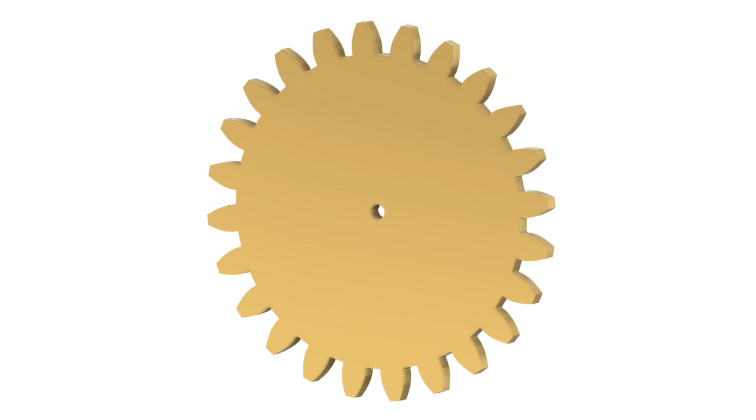Gears have many applications in our modern society. We use them for cars, clocks, bikes, toys, pretty much anything mechanical. The cogs or teeth on gears are what make the magic happen. They interlock, allowing for the transfer of power from one gear to another, and when two gears have different amounts of teeth, you create a gear ratio between them.

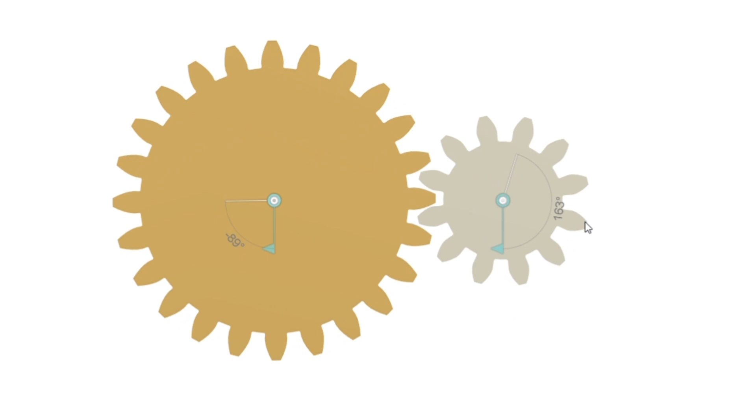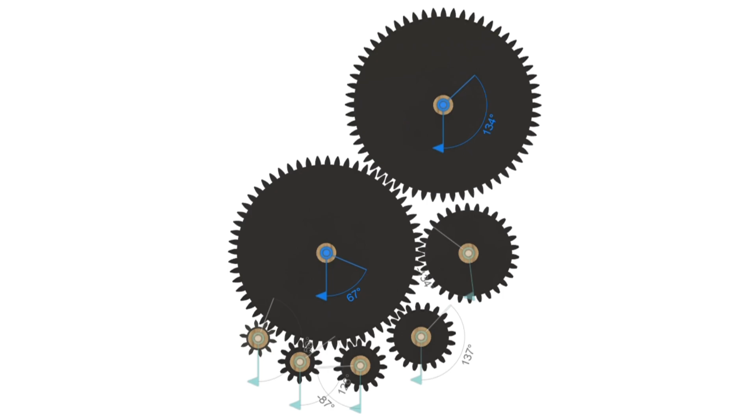Gear ratios are what allow you to have a mechanical advantage, making something seem lighter because you've increased the amount of torque that you're able to generate by using a smaller gear, like so. You could also use the gears to speed something up, like so, allowing for neat tricks like this when you've got multiple shafts spinning at all different speeds, despite being driven by the same gear.

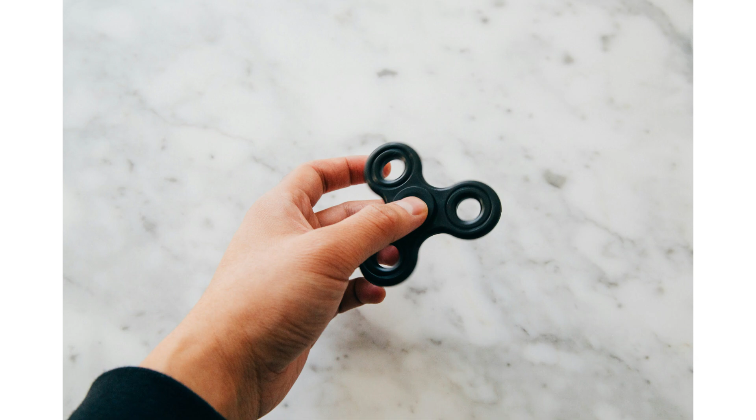So what can we do with this information? Well, a lot. We could make gearboxes that power drones, cars, planes even, but I have something much more important planned for today's video. We're going to make fidget spinners. Well, not that kind of fidget spinner. We're going to make gear spinners that interlock and drive each other.

I'm going to use spur gears for this design because they're the most efficient type of gear, capable of efficiency up to 99%. This means that when you're using a spur gear to power another spur gear, up to 99% of the energy that you put in will come out. The other 1% is lost to frictional forces between gears and the air.

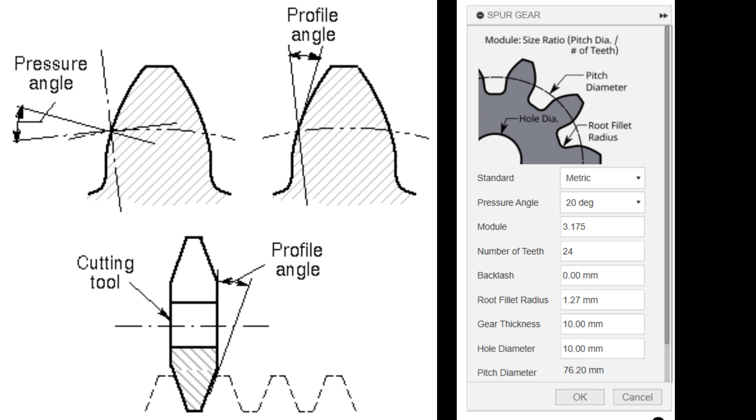So, in making a spur gear, you'll notice I have a few numbers to plug in. Starting with the pressure angle, it's the angle between the line of action and the line tangent to the pitch circle. We'll keep ours at 20 degrees. The larger angle distributes the force more evenly along the tooth profile, which reduces the likelihood of tooth failure or deformation under heavy loads, under normal circumstances. But it won't matter anyways, since none of these gears will be under any significant stress.

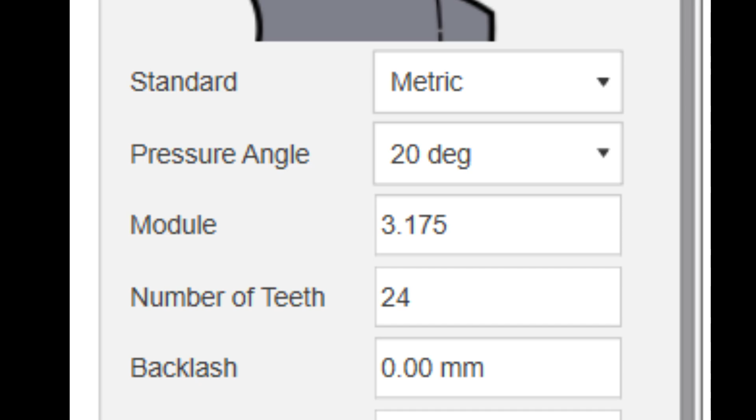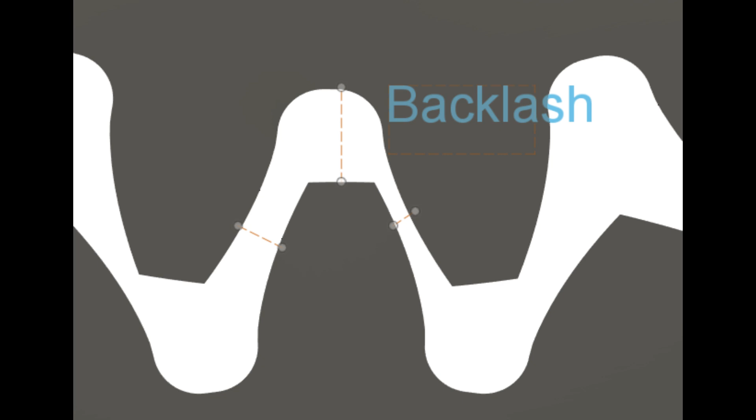Next is the module, which is the measure of the gear size and determines the size of the teeth. It's the ratio of the gear's pitch diameter to the number of teeth. In metric units, the module is expressed in millimeters, and here we have set it to 3.175. Backlash is the small amount of play or clearance between meshing teeth. It prevents gears from jamming and compensates for manufacturing tolerances, in our case 3D printing tolerances, which are up to 0.1 millimeters, so we will set it to 0.1 millimeters.

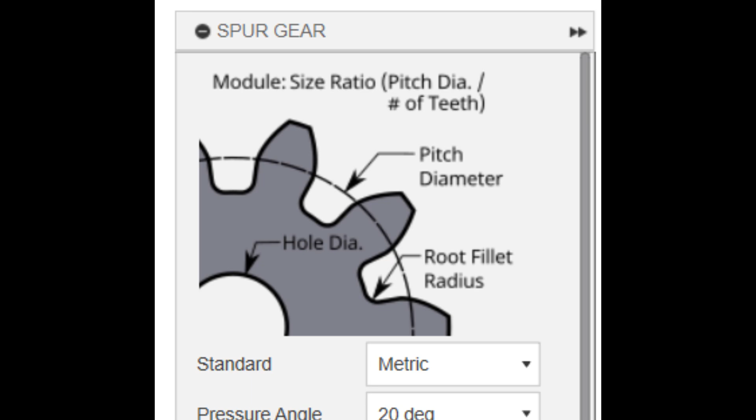Finally, the pitch diameter is the diameter of the pitch circle, which is an imaginary circle that rolls without slipping with the pitch circle of the mating gear, or the meshing gear. It's a critical dimension because it helps determine how the gears will mesh.

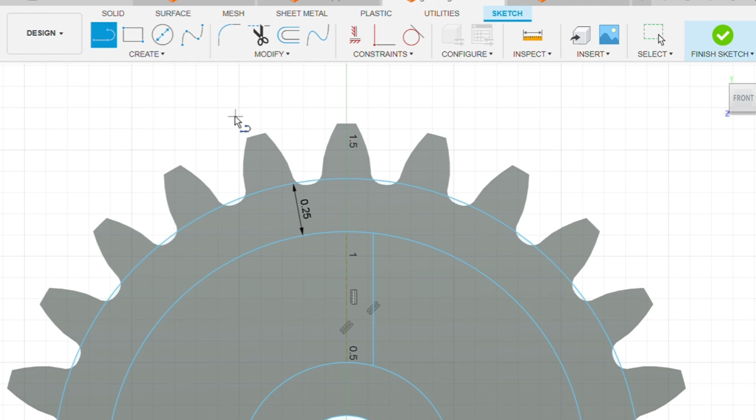While I'm making the last few finishing touches on this gear, let's talk about why spur gears are so efficient. They have a constant mesh. The teeth of spur gears mesh smoothly and continuously because they engage one at a time. This ensures a consistent transfer of motion and torque, leading to efficient power transmission with minimal losses. They are formed with an involute curve profile, which means teeth roll against each other like two circles rolling, which only contact one another at one point, which results in minimal rubbing and minimal power loss to friction.

Okay, looks like our gear is done. All that's left to do is put bearings in the center of these gears to allow for smooth spinning. There's more on how these bearings were designed in another video.

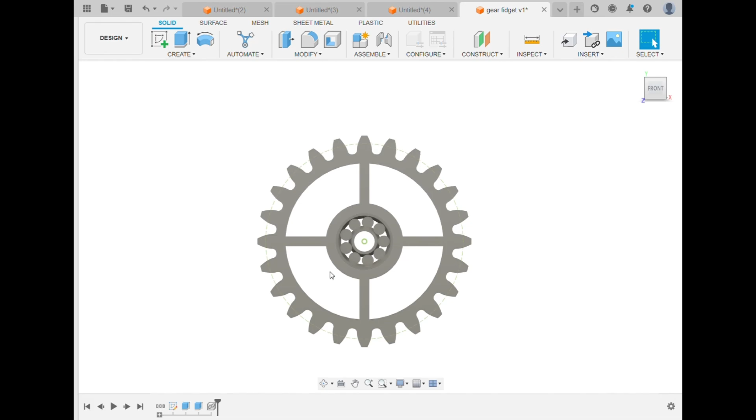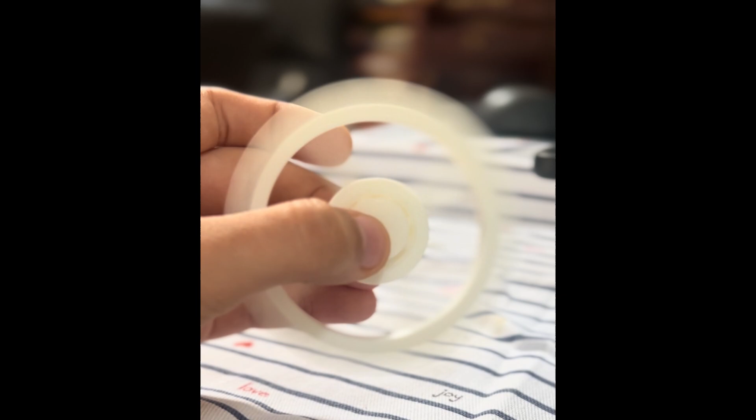On to the assembly. These parts were printed with the Creality K1 and are also available on Thingiverse for your enjoyment. I've also designed and printed one other gear size so that we can see our gear ratio of 1 to 2 in person. Now that everything's been printed, let's try out our first fidget spinner. You'll notice it's a bit loud, and that's because of all the balls in the bearing rattling around as it spins. Now, let's try powering another 24-tooth gear with this one.

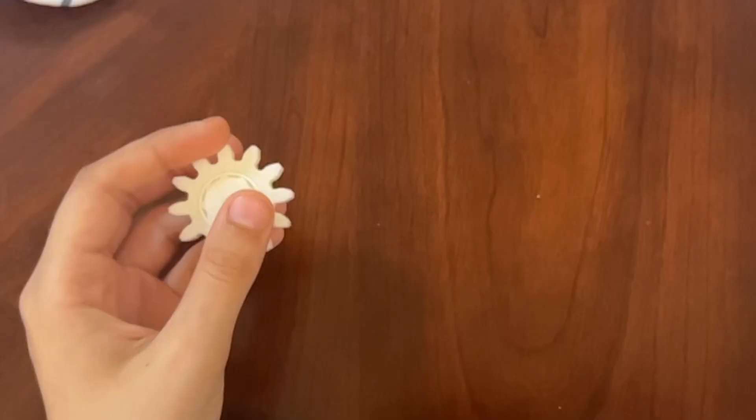Notice how while they spin, when the first gear makes one revolution, the driven gear also makes one revolution, and this is because the gear ratio is 24 to 24 based on the teeth, or 1 to 1 simplified. Moving on to our smaller gear, you can see since it only has 12 teeth, it's about half the size of our 24-tooth gear. Once again, if I power a 12-tooth gear with another 12-tooth gear, we get a 12 to 12 or 1 to 1 ratio, so as our first gear rotates once, the second gear will also rotate once. On to the fun part, one 24-tooth gear powering one 12-tooth gear.

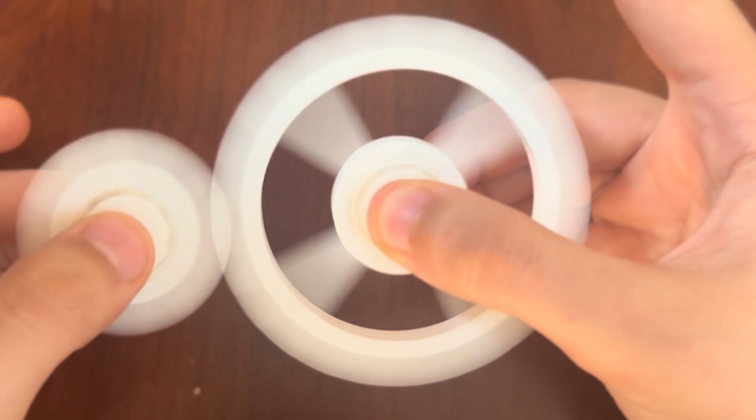You can see that as the bigger gear rotates once, the smaller gear rotates twice, which means the smaller gear is spinning faster in terms of angular velocity, since we've created a 2 to 1 gear ratio coming from 24 to 12 teeth. Now, if we power the 24-tooth gear with the 12-tooth gear, we get the opposite, a 1 to 2 gear ratio, where when the smaller gear rotates once, the bigger gear only makes half a revolution. We may have slowed down our output gear, but we have generated twice the torque that we put in.